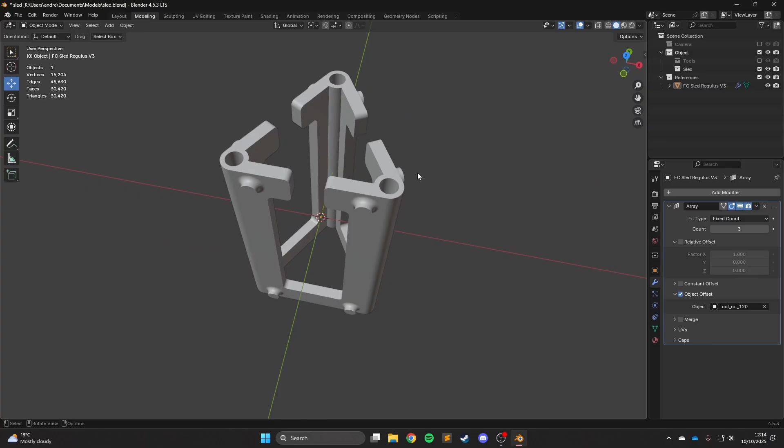So you can get 3 of them, you can get slightly different arrangements, and you can hook them all together, and they go in the middle, and you have rods that go down here, and then that's inside the rocket. So as you can see, quite a complex part. It's symmetric almost rotationally, so the bottom half and the upper half are essentially rotated around the origin here, but it's also symmetric in the middle vertically, like it's got a mirror symmetry here, so it's got 2 kind of opposing symmetries that's going to make it really complicated to model.

So the point of this video is I'm just going to guide you through modelling this, not as a direct tutorial, but just to kind of give you an idea of how I would approach a problem like this, and just to get you an idea into my thought process while I'm modelling. So let's just get started.

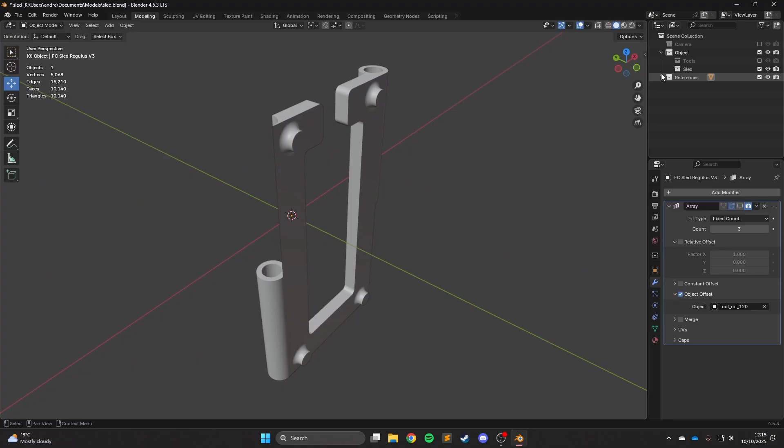So the first thing we're going to do, we're just going to create a little - so I've got these all arranged separately here in little containers, or what do you call it - collections, there we go. So we're going to start off, again this is quite a small part as well, we're going to start off just get a general shape, and then we can get more precision once we need it.

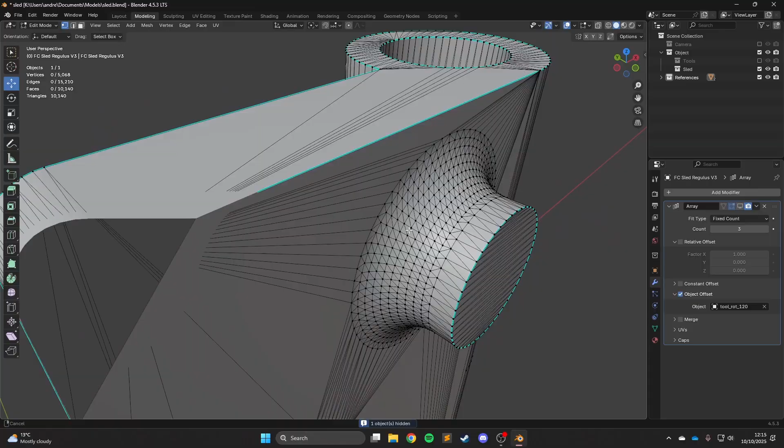So what we're going to do here, I'm just going to snap the cursor. Once you go into edit mode here, you can see the reason we are retopologizing this is because this was exported essentially for 3D printing, right? So God knows what's going on here. This is the kind of thing you would get typically when you mesh something in a software like Fusion 360. You would get this sort of very all over the place topology, because it only adds vertices where it thinks it needs them, so it doesn't retopologize anything properly for you. So we're going to fix that.

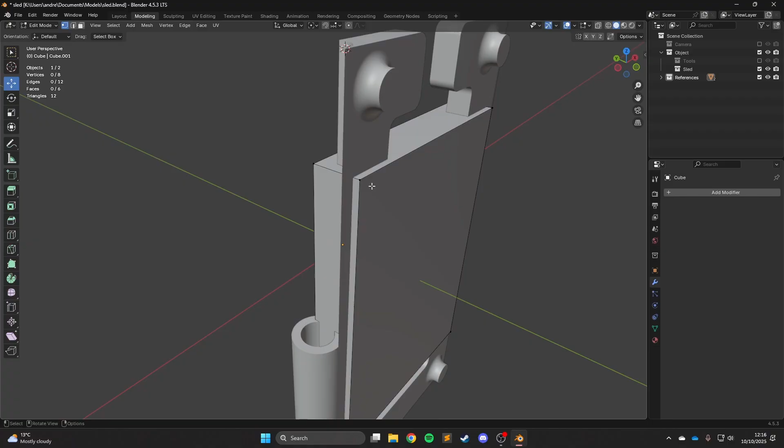We're going to go in edit mode here, right click, snap vertices, tap cursor to selected so that we have the 3D cursor there. Then we can select this face, and we can just go S, make sure that this is set to 3D cursor. We'll go S, Y, 0. And then that aligns that perfectly. And you know it's aligned perfectly when you start to get this Z fighting here. Don't worry about that for now.

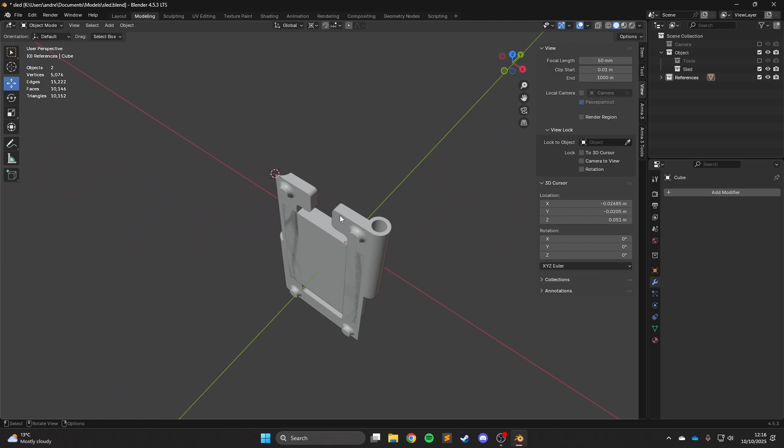But remember, we're going to change the clip start and clip end, because we do not need to see 1,000 meters out here. This thing is about 100 millimeters tall. So let's make it 10 meters here, and then we can take this down. Usually if we don't take this down, then it starts to clip quite early and zooms in here, and if you're trying to get really close in, it just starts to clip things off. So you can set this to like 0.1 millimeters, and there we go, now you can zoom a lot further in.

Cool, so you can do that thing with the 3D cursor. Another thing you can do, set the cursor back to the world origin. You can select one of the meshes, shift select the other mesh, and open them both in edit mode at the same time. Now you have to be careful here because you can select the wrong thing and screw up the whole model. But what you can do, if we select this face, go into face mode, select this face, go into vertex mode, and select one of the vertices we want to align it with here. Then we set this to active element. We can then just go S, Y, 0, and it lines it up because this is the last thing that was selected. So the last thing that's selected is highlighted in white here, and it uses that as a reference point.

So that's what we're going to do. We are going to just bring these all up here. But you have to be careful. See, when you open these both, if you have something selected here and something selected here, opening them both will select them both. So you need to be careful. Select this - actually, we're going to open them both and deselect everything.

We're then going to select this vertex and this vertex, and go active element... or sorry, we're going to select this whole face. Actually, we're going to select this, then align it. There we go, just to get that aligned. I'm going to do the same with the bottom face here.

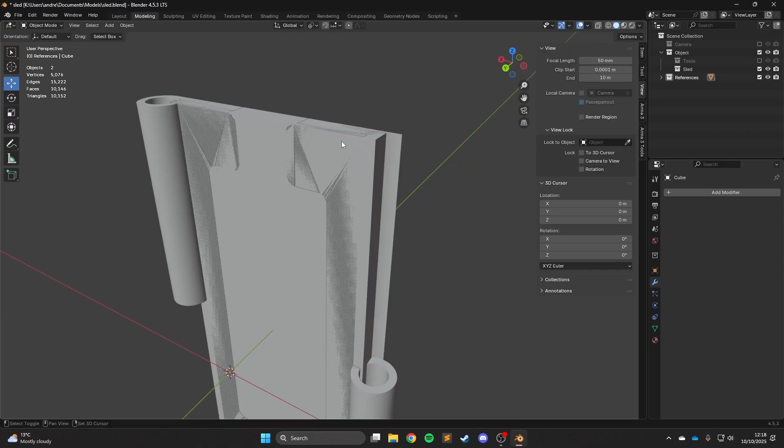Right, okay. I may split this video into several parts if it ends up taking too long, but we'll see. Looking at this now, I think I might... oh no, we'll come to that when we get to it. I might pull this side in a little bit, if I can, and just hook that, or kind of line it up with this for now.

Then how would one do the... right, okay, maybe not. Let's pull that back. Let's see if we can just hook it up to... or not hook it up, but kind of align it with that. Right, okay.

So we're going to get the same thing. We're actually going to pull this side out here. We're going to line this up with... not you. Right, deselect everything. So again, this is why you have to be careful when you're opening two things in edit mode at the same time - you can just select the wrong thing. So the 3D cursor is good, but this can be quicker.

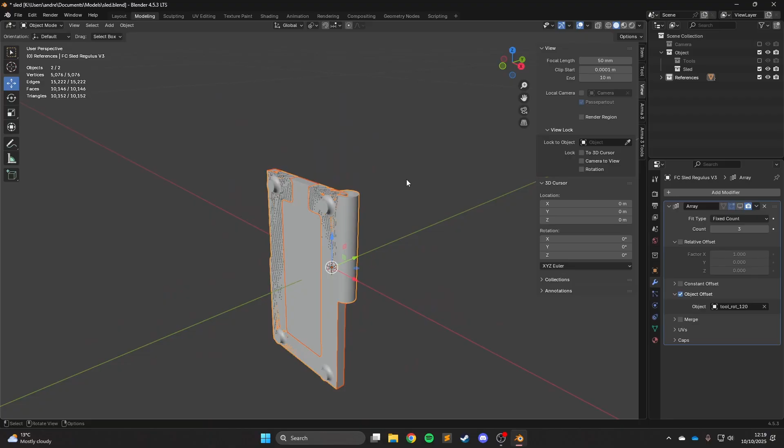Right, okay, so what we're going to do now, I think we're going to work on the rod kind of poles here first. So what we're going to do, we're going to work on the top one, and then we're just going to mirror it round.

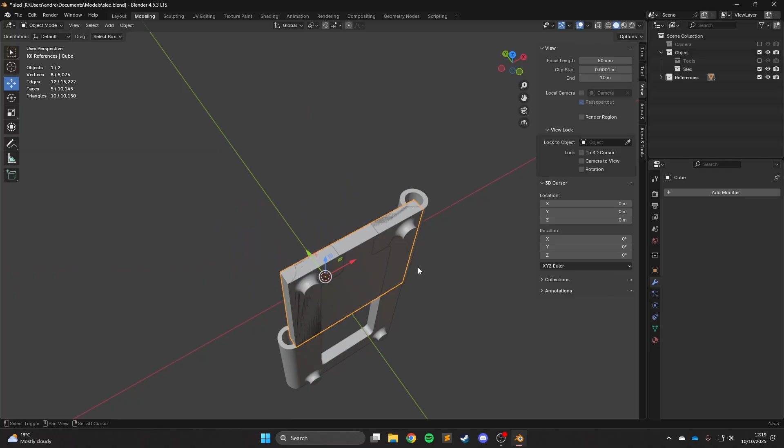So this is quite complicated because you have to match kind of mirrored topology here. Even though it's not perfectly mirrored, it's misaligned - it's going to be a bit weird. So I think we're just going to ignore the bottom half for now.

And what I'm actually going to do is snap cursor to selected here. Oh sorry, we're going to snap it here first. And when you're in edit mode, you can add extra geometry like this - you can just go up and add like a circle here.

So what we're going to do, we're going to set the radius - we're going to figure out what the radius is. So I'm going to guess 15. No, not even close - 5 millimeters. There we go, that's our radius.

And I think that is quite a good vertex density there, so we're going to have 8 vertices on that end. Do we think that's too much? No, we'll go with that for now - worst case, we can change it later.

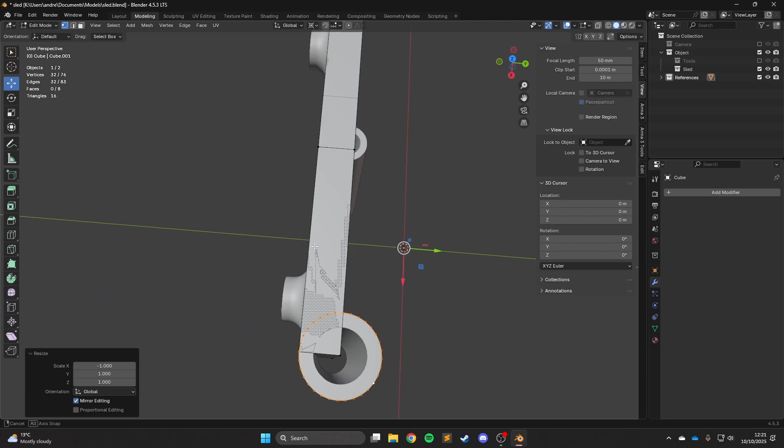So what we are going to do, we're actually going to put a median point in this first, before I forget to. And then we're going to snap the cursor back to the world origin. We're going to take this, set the pivot point to 3D cursor, and go SX -1, and that just flips it along the x-axis here. And that gives us that sort of shape there.

So now what we can do, we can start getting rid of some of the geometry we don't need at the moment - I'm actually going to hide this for now - and some of the stuff we're going to replace later.

So this is where it starts to get quite complicated when you really need to start managing where vertices are, because right now there's 2 vertices in the same spot. So we're going to merge vertices, but make sure the threshold is quite low, so they have to be right on top of each other to get merged.

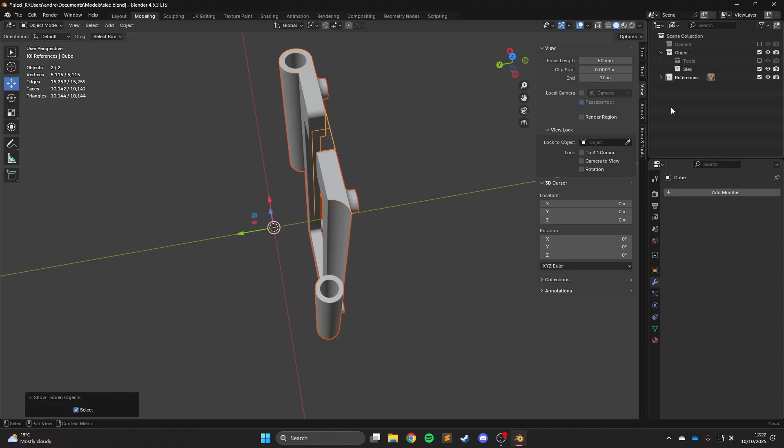We're going to leave that there, actually. We're going to get rid of the parts of the circle that we don't need, just that curve there. I'm going to move this back into the sled thing because I put it in the wrong place. There we go. Now we can hide the references since we don't need them.

Right, so we're going to connect this to here. I'm not too worried about making sure we have perfect topology right now. We're just going to try and connect everything up to get the general shape, and then we can deal with the topology in a minute.

So let's take, say, from all the way around here. Let's go around this way, bring that down there, and then we can just go. Nope, nope.

I said no. I'm trying to avoid, for now at least, having cuts along this way, because we have these cuts in here. I want to give myself as much freedom as I can in the future to get that shape, those kind of complex shapes in the middle, without completely screwing everything up. So I want a grid here that's completely unaltered by this topology. So then that connects up to there.

If you're not seeing the faces like me, if you're seeing them more like this where you can see all the faces from both sides, what you want to do is turn on back face culling in the options. That means it'll only show a face if you're looking at essentially the front face of it. So if the normal vector is coming out of the face, you can see it, but if you see it from the back side, you won't see it — the face just doesn't render.

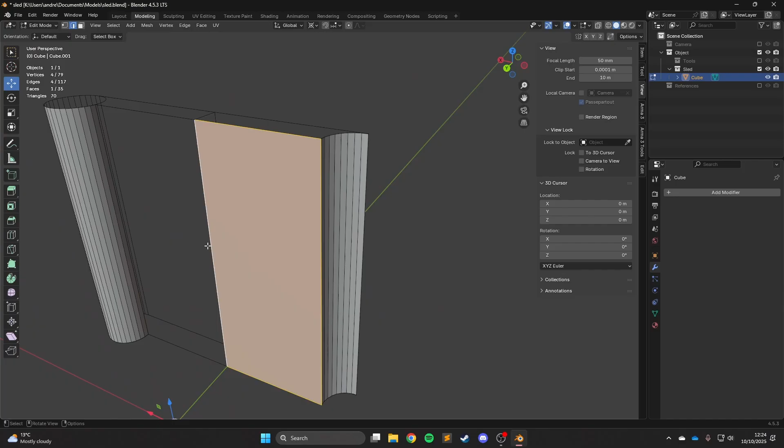So what we're going to do, we select these, mesh, normals, flip. You want to have these aligned, right, just so that these faces can all connect to each other. And then you can have this connected here, and this connected here. So we're already starting to get somewhere with this.

What we're going to do now, let's have a look. We're going to get this here, and I think we are going to — right, what I'm actually going to do is try and get this middle point back.

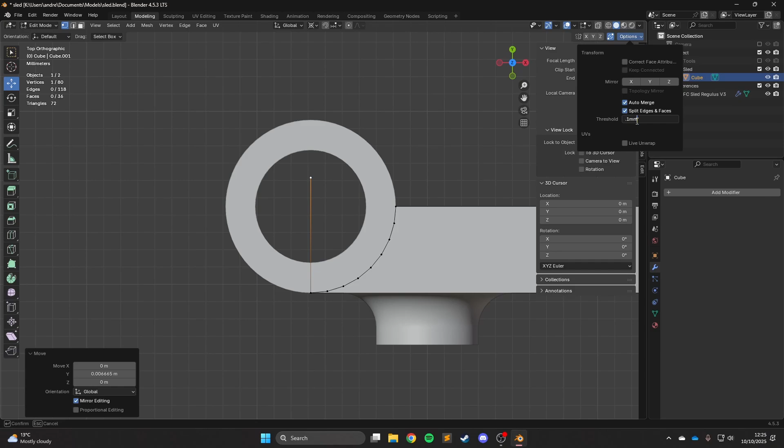One of the ways, if you've accidentally deleted the vertex and then realized you want to keep a vertex here to use as a reference point, say the center of a circle, you can press G along the y-axis, and then turn on auto merge vertices, and do split edges and faces with the threshold set to like 0.1 millimeters again. Then you can do it along the x-axis, and if they're all perfectly on top of each other, it'll create a vertex where they intersect. There you go, you've got a vertex where you need it. Now we can snap the cursor to selected, and make another circle here.

32 — we're going to make this maybe a 3 millimeter radius. Nope.

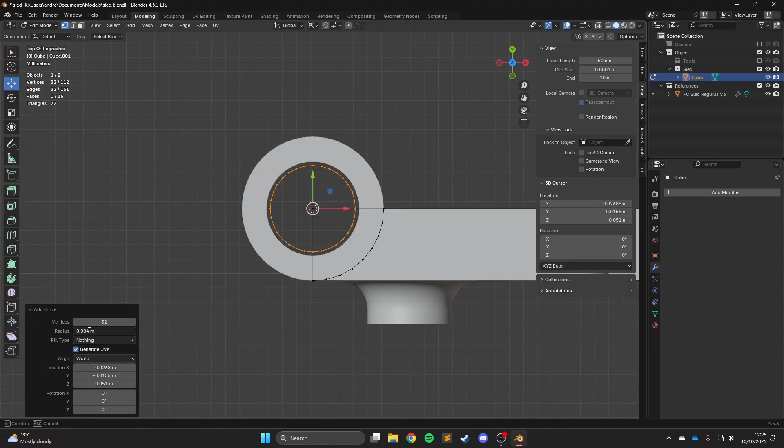4, nope. 3, 5, nope. See, this is where I'm just kind of trying to guess the exact position. 3, 2, 5. Hey, that'll do, there we go.

So sometimes you have to kind of guess, like if you have dimension drawings and that kind of thing, you can nail that in perfectly - that's not a big deal, but at this point it's just quicker.

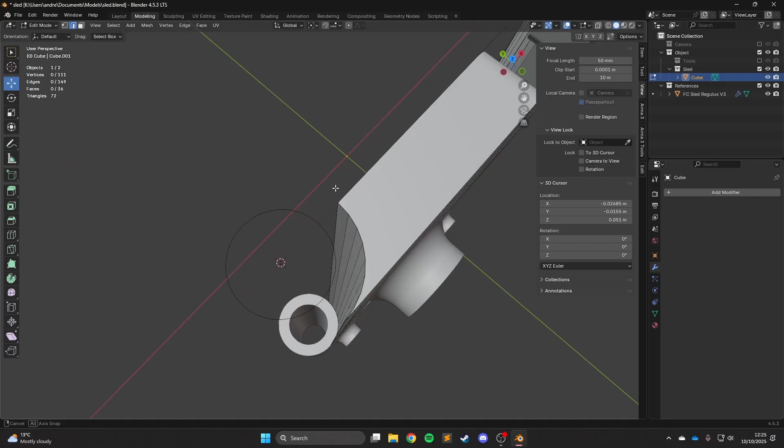I just realised I've done this on the wrong side, because this is the side where the hole doesn't actually exist. So what I'm going to do is this trick again: 3D cursor, set it back to the middle, cursor to world origin, S, X, -1, and it just flips it over there.

So now I want to try and keep this cylinder geometry as undisturbed as possible, because I feel like it'll just become an absolute headache if I try and screw with it later on.

So what I'm going to do now is add an array modifier, just to make sure that the topology I'm going to create is lined up on this side. I'll show you what I mean by that in a second.

So we're going to make plain axes, make this like 10 millimeters or something so it doesn't get in the way. We're going to go in this view, rotate it by 180 degrees, and then put that in the tools thing here.

I've got another one as well that I was using earlier. We're going to call this tool - you can call it whatever you want, but I usually just go with tool rot 180, meaning it's rotated by 180 degrees.

Then if you go to object offset here, tool rot 180, make sure the count's at 2, turn off relative offset and any of the other options. We're also going to hit merge here and just make this like 0.1 millimeters again. There we go.

So now you can start to see what I mean. We need to try and keep these vertices lined up, and it's quite difficult because it's not like it mirrors perfectly along here, it just rotates itself around.

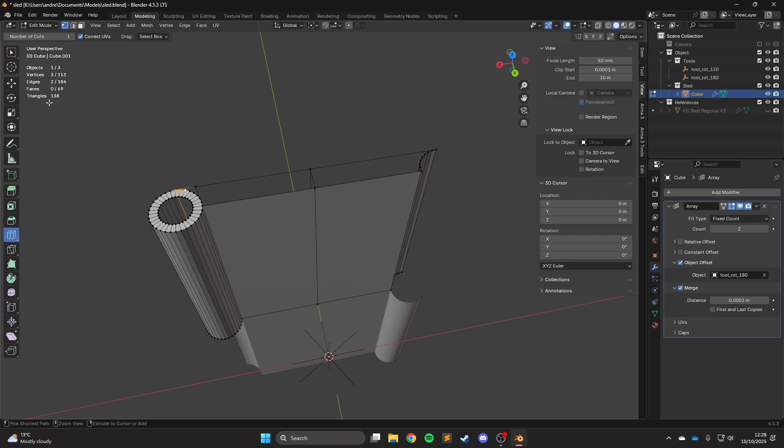So you really have to think about which way your edge loops are going. Whenever you try to make a cut, like a loop cut, you want to think about which way they're going - you can't just obviously just preview them with this.

So you want to try and make it so that they don't... it's quite hard to explain with this model because it's such a complicated one, but say you had like a mesh that was a kind of cubic type thing here. Why is that so small? I don't know what just happened. Oh, it's so big, this one.

If you have faces here, you're trying to keep these vertical faces and these horizontal cuts separate, so they don't interact with each other. Because if you start getting geometry that goes around here, you might start getting them looping around all over each other, and that is bad. You end up with a bad day.

So let's have a look at this. I think one of the best ways we could potentially do this, we're going to give this a try. I don't actually know how good this is going to end up, but the best way is really just to try it at this point.

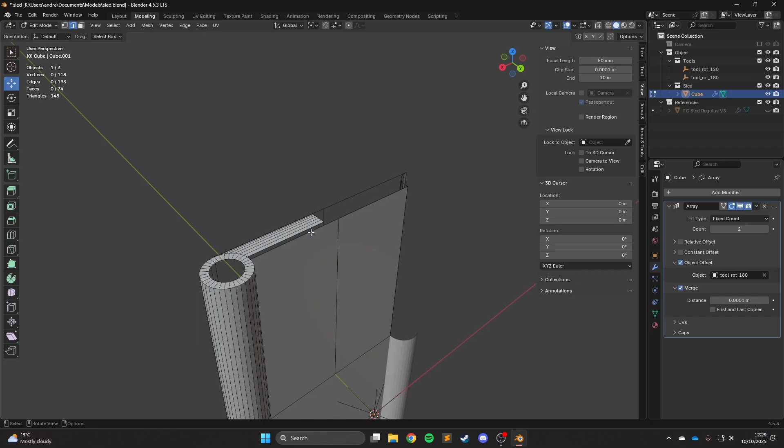If we just take this and we do this, scale it along the x-axis here, we're just going to give this one a try. We're essentially just going to see if we can loop around the inside here and try and keep it as cubic as possible.

Part of me thinks this should be fine, but again, I can sit and think about this for ages, or I can just try it, and then worst case, if it doesn't work, I can undo it.

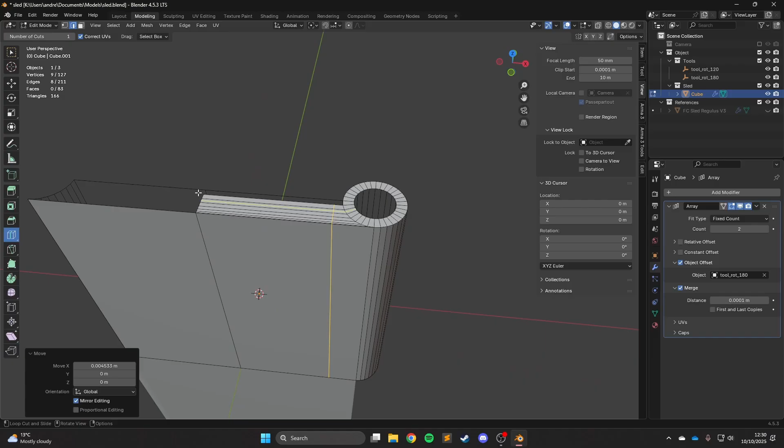Now, the problem with this is we're starting to get very long, very thin faces here, so what I would probably want to do at some point is add like a face, just to kind of make sure that these faces are at least not too warped.

Right, let's give this a try. Like this. So let's have a think about this. How would this work?

So if I wanted to add a loop cut here, then that would go round to there, right? Actually, I'm going to kind of pick up some of these as well.

We're just going to get this, we're going to scale it, move it down on the z-axis here, we're going to connect this up here. And you can see it came up there too. And now, what has to happen, it has to go here.

Okay, that's what... yeah, make sure, complex topology like this, sometimes holding F just doesn't work the way you want it to. Right, okay, I'm going to turn off the array for now just so you can see what's going on.

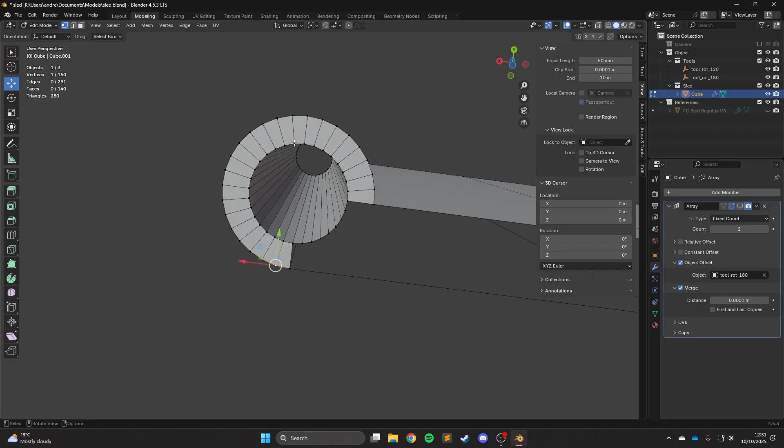We need to worry about this now. That's actually what I'm going to do. I'm going to get the 3D cursor in the middle here. Because we have this full circle in the middle now, it's a lot easier. We can just select this whole thing and make sure it's bounding box center, vertex mode, snap vertices, cursor to selected.

And now what I'm going to do is I'm just going to select this here. We're going to go into this view. And you can adjust these views by just using the numpad. So 1 is this kind of front face, and then there's 3, and then there's 7, which is the kind of top face, but then if you hit 9, it flips whatever face you're looking at.

So, 3D cursor, rotate this by 90. And then we can again just merge vertices by distance, and remove 2 vertices. You can always check - you should expect it to remove 2 because there's 2 doubled up vertices here.

Right, okay. So now let's have a look where this goes. So if I wanted to make a cut here, it would go down here. And yeah, good. Okay, so you can see if I made that cut here, it would kind of make a cut here as well. You can kind of see where that line is here. I know it's kind of hard to see with all of the extra lines, but you can see it comes down here and it goes along here.

Cool. So that actually works a lot better than I thought it would. I thought it would be a lot more complicated.

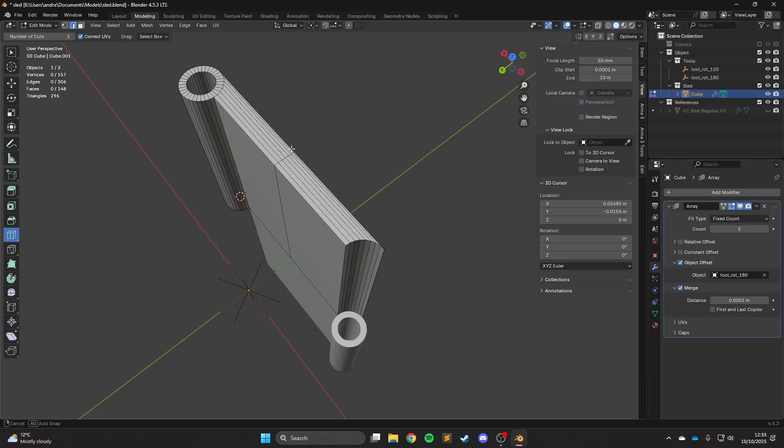So now everything kind of lines up. You're trying to keep these lined up so that if I was to make a cut here, it would just go round this, up over the top and through the hole, and then back round and loop back onto itself, instead of going, say, this way and then to the right and round.

Now if you want to make a cut just on this side, say if I was trying to make the middle geometry again, if I was purely trying to make cuts into this face, you might end up with a scenario where making a cut on this face has it go round here and then up and then through the hole. Right now the hole's very evenly spaced, it's got this perfect circular geometry.

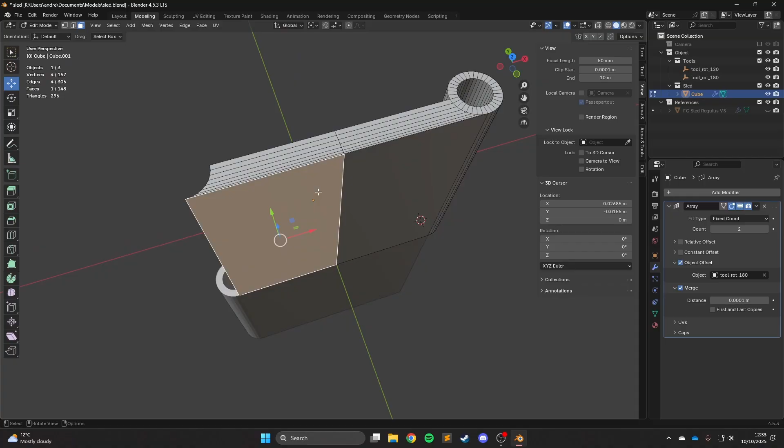You don't want to end up in a scenario where if you're trying to make this kind of cut in here, you have to screw up this, because that means a lot more work just to get a basic shape in here. So that's what I mean by confining complexity. You're trying to keep all the complex parts separate, think of them as individual problems, and make sure they don't affect each other as best you can.

Right, okay, so I believe we might be done with this basic shape, actually. So now what you can do...

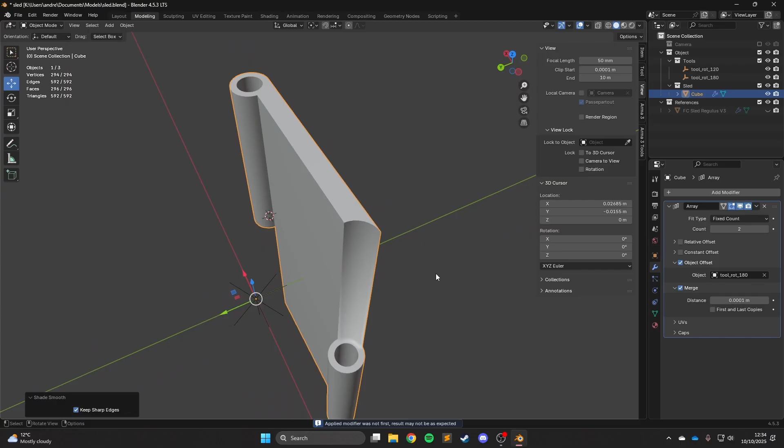For now we can shade smooth. What you want to do actually is right click, auto smooth for now, and then you can just apply it because it starts off as a modifier and it's not perfect. Obviously there are some things you may want to mark sharp, and then you can just shade smooth. Make sure when you shade smooth, keep sharp edges turned on, because it'll override it if you don't do that.

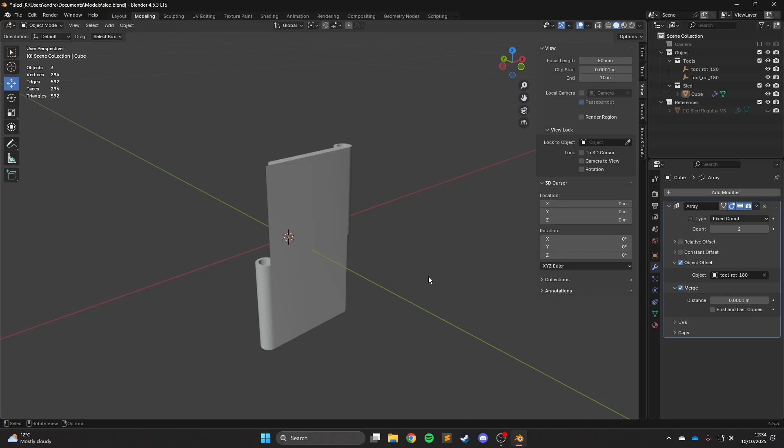Next time in the video we are going to do the other section here. We're going to do this middle cut here and then the little standoffs here for the screws. Typically this would be threaded, there would be a thread in here, but when it's 3D printed it's just not threaded, and then you can thread it later.